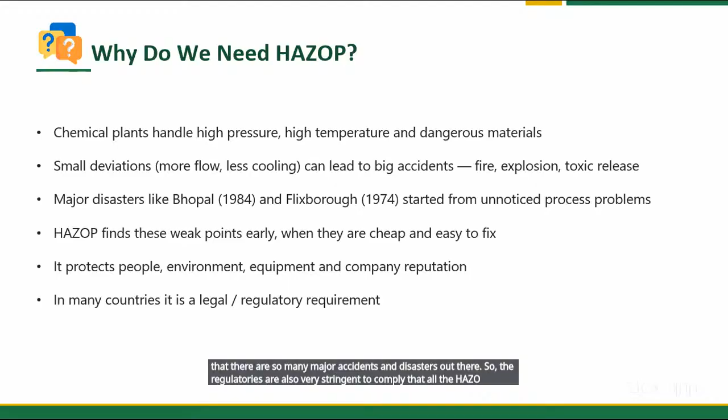Yeah, if there is any suggestion you can just give me during the presentation, so I can go much faster, you can also suggest me. Sir, good afternoon. This is okay, sir. It is not too fast, not too slow. You can go at this pace. Thank you. Okay, thank you so much. So basically, sir, one minute.

You can elaborate a little bit: process hazard analysis and QRA are correlated. These documents are also key documents for further analysis in the HAZOP study. Yeah, it is also part of it, particularly in HAZOP when we break down the process. The storage part is particularly covered in the QRA, because there is bulk storage, and the more hazardous area is the bulk storage for raw materials and particular chemicals. At that time, PHA and QRA are also a major part of the HAZOP. In the next couple of slides, I will brief you on where the QRA is covered in the HAZOP.

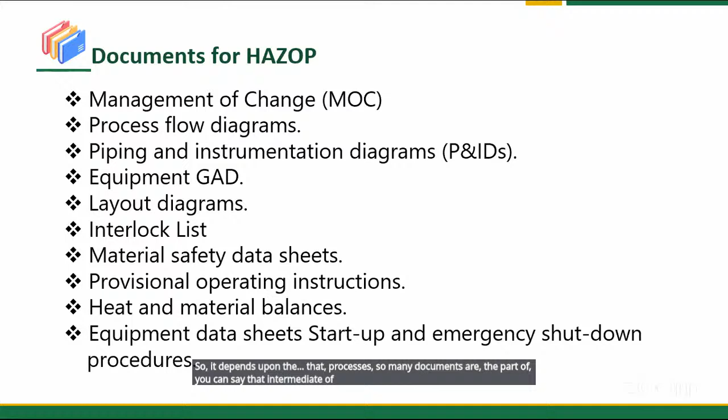Now coming forward, what are the key terms we have to use? First is a node. Node means the one section of the plant that we study at a time. Just giving one example, one vessel or tank is there, a reactor is there. Normally we are pumping the material to another tank. So this particular part we take for the HAZOP study, and we mark it as a node, node 1, node 2, as we move through the process. So basically the node is a part.

Second is a parameter. What are the parameters we are using, like flow, pressure, temperature, level, and there are lots of parameters. Particularly we can say time also, and some other parameters depend upon your processes. So the basic parameters are level, flow, pressure, temperature.

Guide words: we have already said that the 7 guide words we have to apply for all the parameters, like no, more, less, as well as more than. All the guide words should be applied for each parameter. Then deviation. We have to identify for each guide word; suppose we mention flow, we have to mention if there is no flow, what will be the deviation. Second, if the flow increases, more flow, what will be the deviation. I have one format we will discuss later on, so it will be visible how the parameters and deviations work.

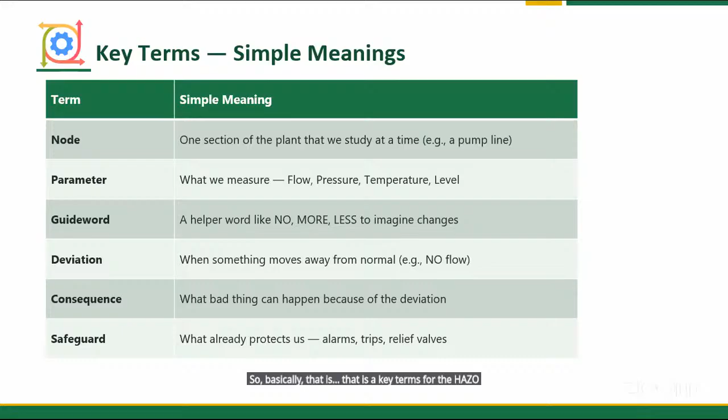So these are the hazard versus deviation in this process. The hazard is something with power to cause harm. The harm due to that particular activity and process will be the hazard, like flammable materials like fuel and solvent, toxic gases, high pressure and high temperature reactions, any reactive materials handling, hot surfaces or rotating machineries. A hazard is always there. We must control it.

We can say that for the processes we have predefined, there is a much lower probability to eliminate or substitute, because when we are at the stage of the HAZOP, we have already tried all the things that we can eliminate and substitute, but there is no possibility to eliminate. So ultimately we have to go for the best control, which is engineering control. So we will look at how the engineering control will work.

Then the deviation part, like the process going away from the normal. So what are the parameters and what are the design criteria we have defined? If during the process it does not match or it is deviated, that can lead to any minor or major type of disaster or accident.

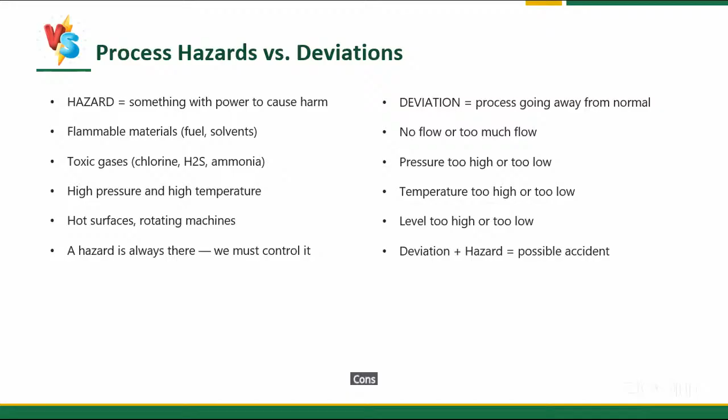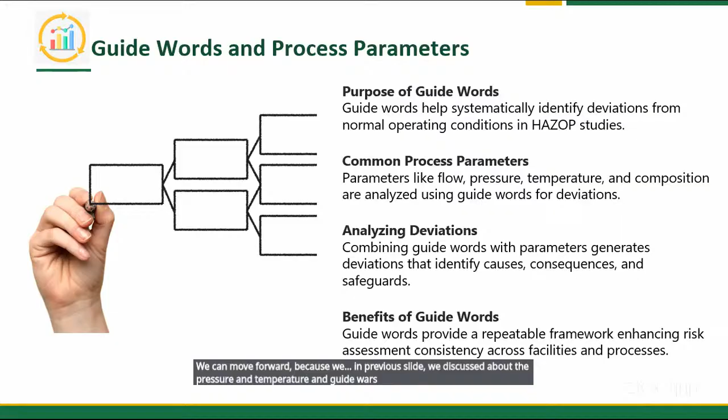So guidewords and process parameters. Basically, we have already discussed guidewords, but we can move forward because in the previous slide we discussed pressure, temperature and guidewords. So now what each guideword means, with some examples. Suppose we consider "no": whatever flow or parameter we are considering, the design intent is not achieved; that particular parameter is not coming there. So no flow when production is expected.

Suppose, as in the example we have taken, a material is transferring from one tank to another tank. At that time, for any reason, due to a deviation, the flow is not coming. So is there any particular impact on the risk? So that will be for the word "no".

Second is "more". This means a quantitative increase. If the quantity increases in any parameter like flow, temperature or pressure, then what will be the consequence? That should be defined. Same thing for "less". Less means the quantity is decreased. If the quantity is lesser, what will be the consequence? Like pressure will be low, flow will be lesser, temperature will be lesser.

So what will be the particular consequence due to that deviation. "As well as": an additional activity occurs, other valve closes at the same time. Sometimes "as well as" means there is a human error. We have to open only one valve, but by misoperation another activity also started at the same time from the same equipment or same node. So two activities happen at the same time.

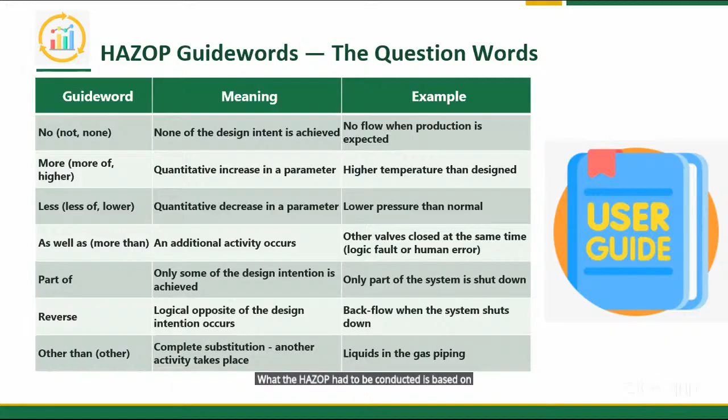Some more words we can also use based on our processes, like unclear. Suppose for any of the equipment or any process changeover we have, the main part of that equipment and the process should be clear, but if it is not clear, then it can also lead to accidents.

Steps in wrong places: the process will lead to action out of correct sequence or recovery fail. Suppose we have to charge three materials A, B, C, first A, then B, and then C. But due to some wrong step and wrong operation, material B is charged first, and then we have charged material A. So in that condition, wrong charging of the material can lead to an accident or failure, and this should be considered.

Wrong action, specific actions: sometimes there are process deviations, and a process parameter we have designed fails, but at that time we sometimes say that nothing will happen, we can take the risk. So that wrong action should be defined.

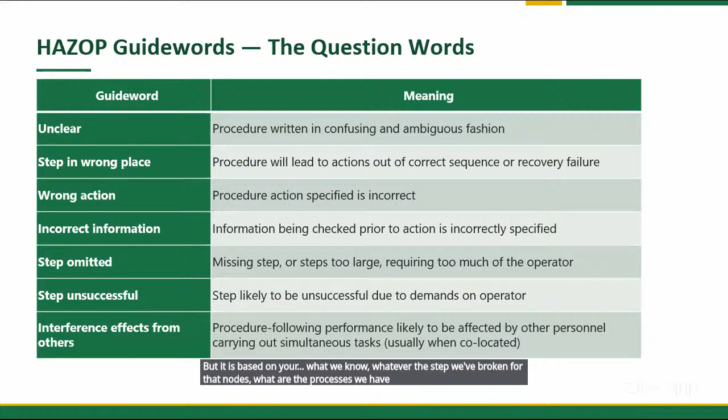In the guide words we can use these, but it is based on what we know, whatever steps we broke down for those nodes, and what processes we have covered step by step. So some of these words we can also use at that time. Particularly if an exothermic reaction is there and we have to provide cooling media at a particular timing, that should be covered under time. If it is more or less, then what will be the effect and what will be the consequence.

Same with sequence: suppose we have to add first solvent or chemical, then after that we have to charge the powder. But if someone alternates the sequence, then what the consequence will be should be defined. Procedures not available, not applicable, not followed.

In most cases the procedures are deviated and not followed because there is no control. We can say that self discipline is the matter in whether to follow or not. Like we can say that the helmet is compulsory to wear, but it is self discipline whether people are wearing it or not. So this procedure should be part of the HAZOP words.

Measurement: instrument failure, observation error. In a HAZOP study, most of the time we have provided some level transmitter, pressure transmitter, and there are measuring equipment and instruments, and we are 100% reliant on that instrument. But in case that instrument fails, then what will be the consequence? So that should also be considered in the HAZOP study.

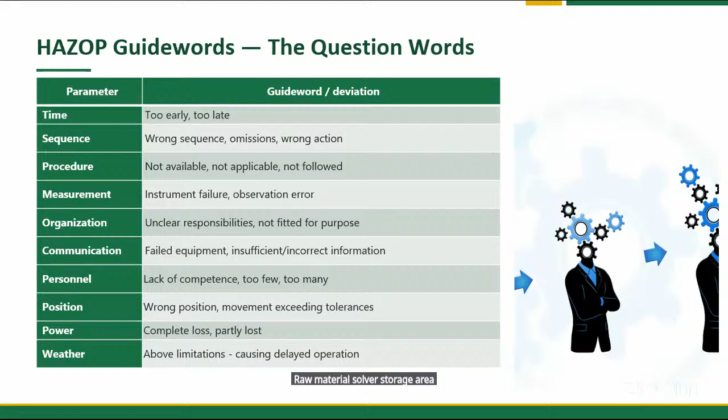raw material solvent storage area. Due to that, in the monsoon season, the lightning was captured by that tower, and due to that, the raw material storage area caught fire. So that should be also considered during the weather part also.

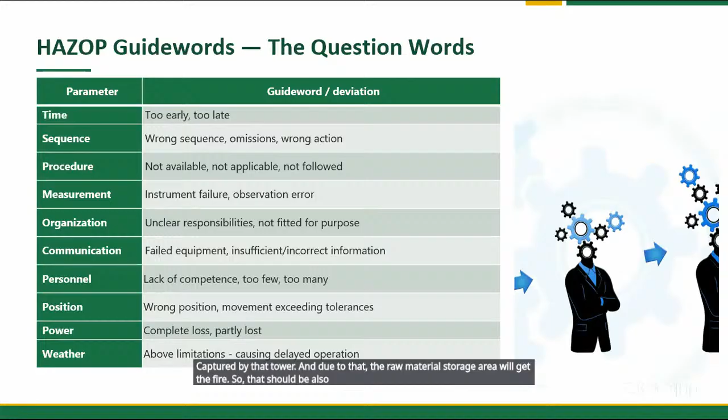This is only a list - some of the parts we can cover like flow, pressure, temperature already. Sometimes mixing also - whether the mixing is completed or not. If the mixing is not done properly, that can lead to accidents or miss out of parameters. So in process, whether sampling is required or not should be decided in mixing.

Stirring is the same kind of thing. In case the stirring is not done, agitating is not done, it should also be considered. Sometimes we have in DCS an indication that the agitator is moving, but suppose the agitator is disconnected from the motor - how can we ensure that by DCS?

So we have to display what ampere is being taken, what RPM is going on. So we can assume, we can show, that there is stirring going on. Same with transfer, level, viscosity, reactions, compositions. If any compositions are there, any additions, any separations, it should be checked if it is done properly as per our process. Then speed like RPM, I have told you.

Particle size - if we are preparing any solid parts, making any process part of a particular particle size, it should also be considered from the dust explosion point of view. Measures and controls, we have already discussed.

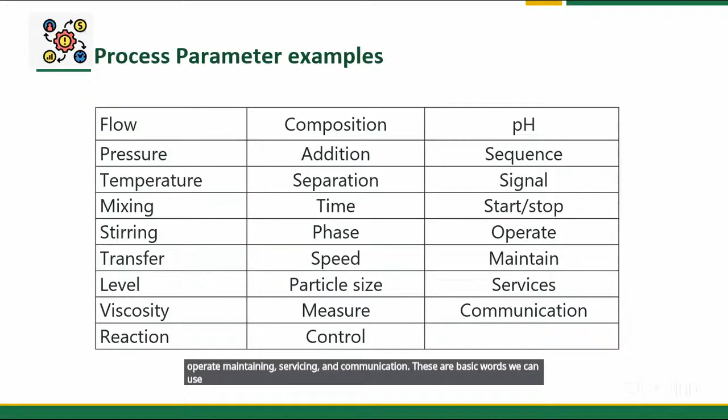So what we have discussed step by step - that word we discussed earlier - this is the flow for that step by step. First of all, we have to select a node, whatever P&ID we have, and whatever points we have to cover should first be covered into one section - in what we call a node. Second is to understand the design intent.

What is the intention for that design and what is the understanding? So it should be mentioned what our intention is. Apply a guide word and get a deviation. If we use that guide word, we can get the deviation. Without a guide word, we cannot get the deviation.

Then possible cause - what are the possible causes due to that deviation? Then think about the consequences - what are the consequences due to those causes? And what existing safeguards we have, what safeguards are provided in the particular process. And after that, if there is any gap, there is a risk matrix.

So we have whatever risk should be considered by a quantitative method. So we have some figure that indicates whether this is a high risk, low risk, medium risk, or moderate risk.

After that, if the risk is moderate or low, we can move forward without any recommendations or additional safeguards beyond our existing ones. But if the risk is high, then we need to implement improved safeguards. After that, we repeat this for every guide word and every node. This process should be applied to each and every node.

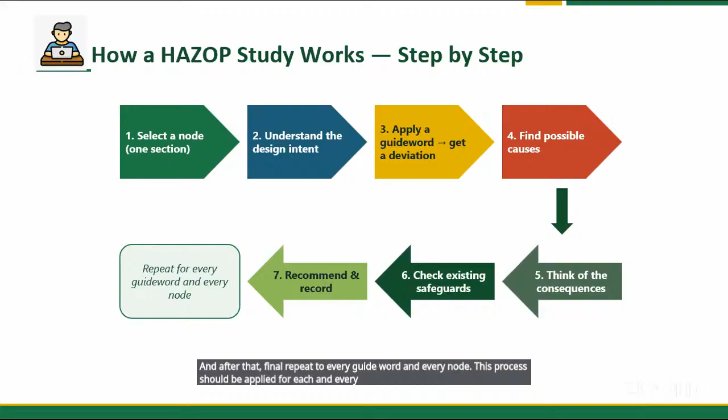So basically, the HAZOP worksheet documents this. I'll skip this slide because I have a worksheet in the next slide, so we will go with that worksheet.

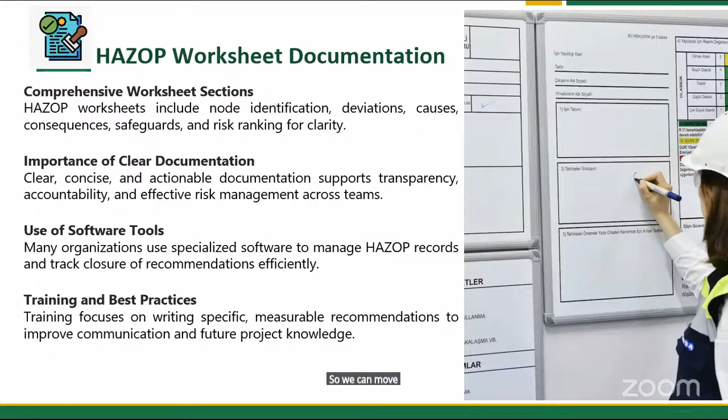I've taken one example for that. Suppose we have a reaction with pressure and temperature, numbered R101. So reactor 101 has pressure and temperature. What are the causes for that?

There is an exothermic reaction, and the consequence is that the reactor will be pressurized. So what are the safeguards? Whatever the operating pressure is, the design pressure for that reactor should first be considered in the GA drawing or design part. There is a pressure transmitter and pressure indicator provided for that reactor to indicate and observe pressure. A pressure safety valve and rupture discs are provided, PSV and PSRD.

There are two PSRDs and one PSV provided for emergencies. If any pressure builds up, the rupture disc and PSV will pop up. For the exothermic reaction, there's a provision of minus 20 degree chilling into the reactor jacket.

Second thing is flow. The exothermic reaction is due to the flow, so a flow meter and flow recorder are provided. The solvent is stopped by the XV valve if the pressure increases in the reactor - it's an interlock. If the flow increases, or temperature or pressure increases, the charging line will stop addition by closing the auto valve, the XV valve.

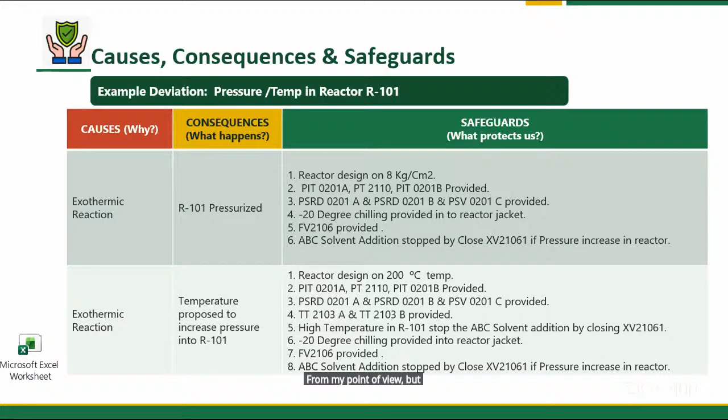But depending upon the process, this is our risk matrix, which I follow based on my previous industry experience. Basically it differs from company to company or consultant to consultant, depending upon the SOPs. So this is a risk matrix.

First of all, you can see there's a quantitative approach - this is frequency per year, based on our historical data. We have to identify from this column the unwanted events that have occurred in the specified time of operation within this industry using the same technology - whether the same unwanted event is almost certain to occur in this type of operation during the life of the operation. There's some wording difference in the evaluation of this quantitative approach versus the historical approach.

Same thing is mentioned here. Basically, if you have any engineering controls, suppose there is no safeguard to prevent that, then you have to put a rank of 5.

Suppose you have a single safeguard with the engineering control, you can mention 4. If there are 2 safeguards, then we can mention 3.

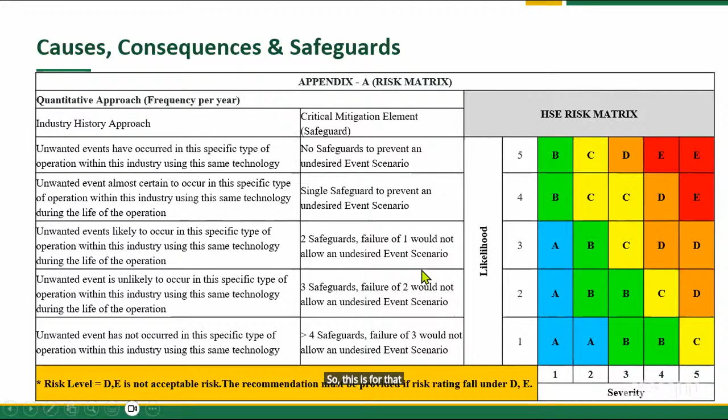So this is for that particular likelihood, and same is for the severity. So basically the severity is based on property damage also, and human injuries also.

So for human injuries, suppose minor injuries or illness due to that particular accident or movement, it will come into 1. We can say that's the bottom of that severity; it is on the second page, due to that space 1 2 3 4 5. Same here is 1 2 3 4 5.

So if medical treatment and hospital admission is due to that incident, then it will be covered under that type of severity, will be 2. Permanent disability will be 3. One fatality will be 4, and more than one fatality will be 5.

Same will be for the property damage, from on-site facility damage and environmental impact also. So in that you can also add more columns and more effects. You can also say that if any other industry has three reportable accidents, then it is also acceptable. So it is based on the industry and the procedure you are following.

So this is like one of the case studies.

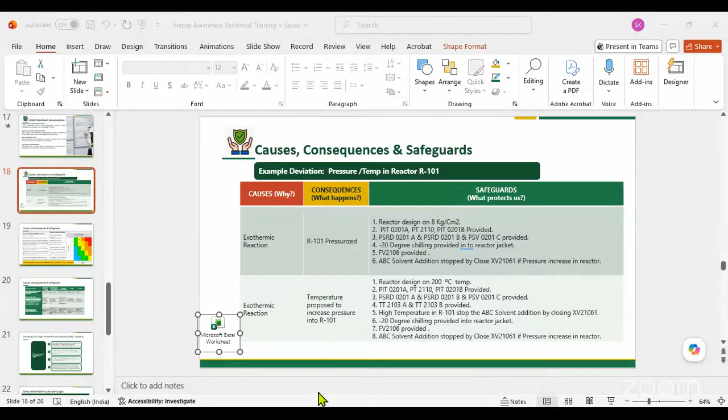Can I show you the format what we have discussed right now? Is it visible? No. Yes sir, it is visible. Only your slide is visible, not the format. Okay, just a minute. Yes, is it visible or? Yes, now it is visible, sir.

So this is the format we are using right now. This is the reference number of the drawing. First of all, we have it step by step for node one, and this is the drawing number, the P&ID number. This is the revision number, and this is the date for that particular P&ID drawing.

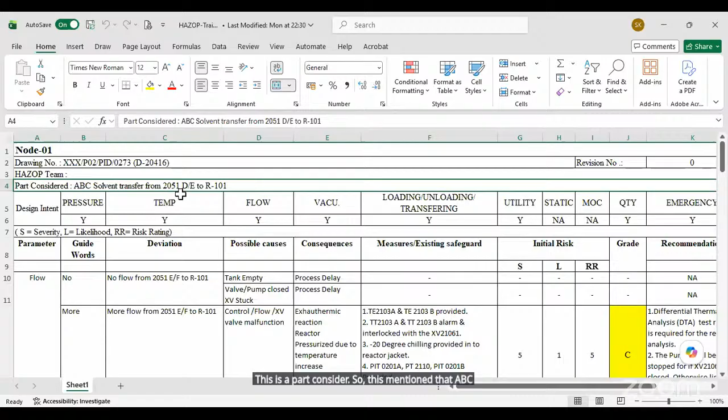Second is the HAZOP team, what team members are there in the study. This is the part considered, so it is mentioned that ABC type solvent is transferred from this tank to this reactor. So this is the part considered for node one.

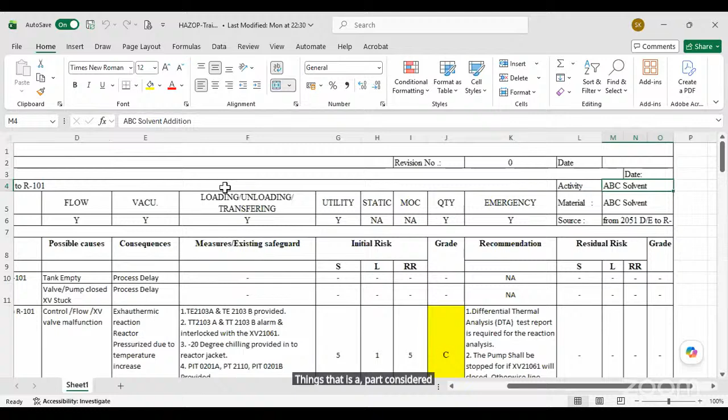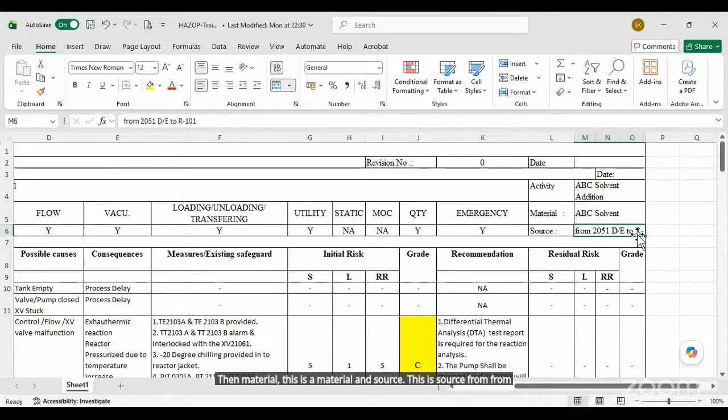And this is the activity here, mentioned that ABC solvent transferring, solvent addition, then material - this is the material and source, this is the source from this tank to this reactor. Okay, and this is the design intent.

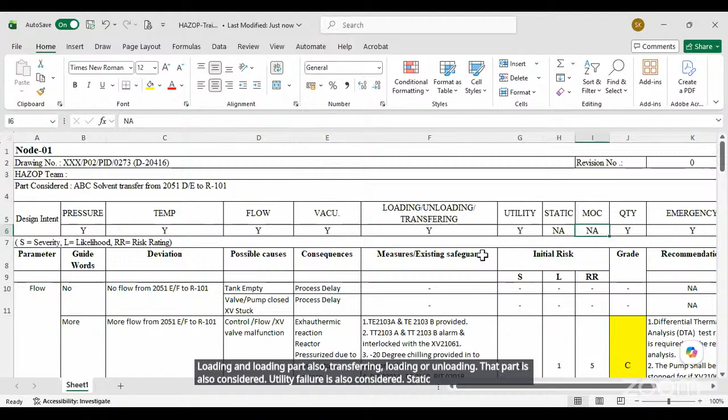So we have considered pressure, temperature, flow, vacuum, loading, unloading part also, transferring, loading or unloading - that part is also considered. Utility failure is also considered. Static is not considered. MOC not considered. Quantity is considered. Emergency considered.

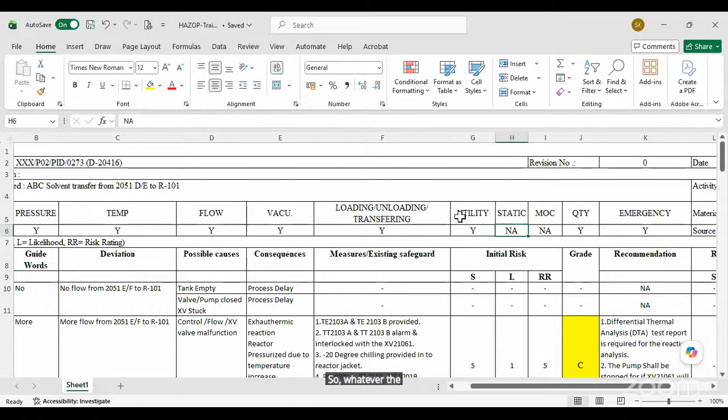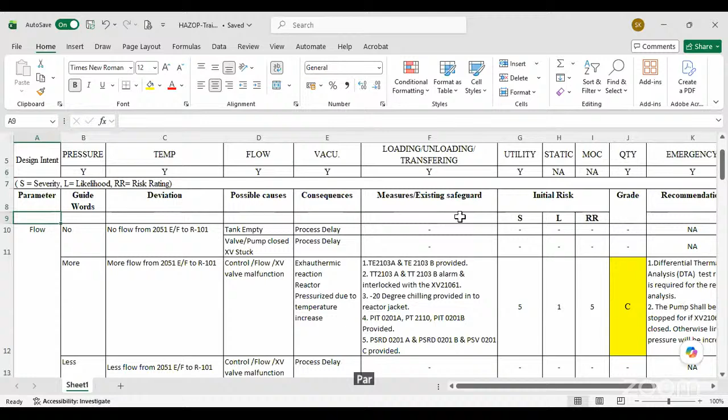So whatever the parts and intents we are using, we have designed - this is a summary so we can get the data that yes, in this node we have considered all the parameters. So basically first of all the parameter here is flow, then this is the guide word.

So suppose there is no flow, so what is the deviation? No flow from 2051 tank to 101 reactor. So what is the cause? Why is the flow not coming? First of all, maybe the tank is empty. Second, the valve or pump or any of the control XV valve, the automation valve is stuck or it is closed.

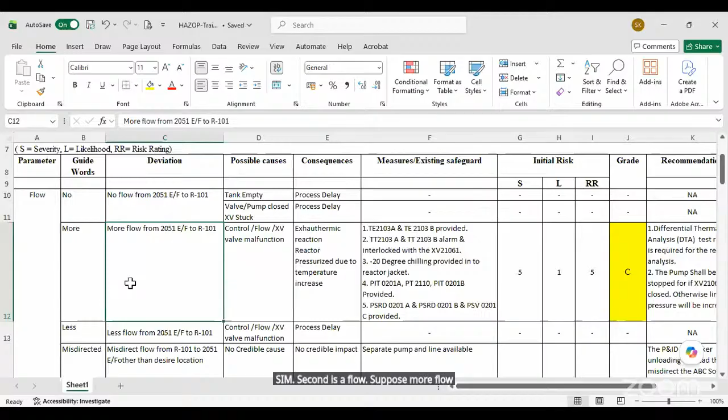So basically, this is a process delay. There are no consequences due to that particular cause, like if the material is not transferred, there is a process delay, nothing - no safety risk is there. Same thing in that case. Same, second is flow - suppose more flow from same tank to reactor. There is a possibility of control valve, flow valve or XV valve malfunction.

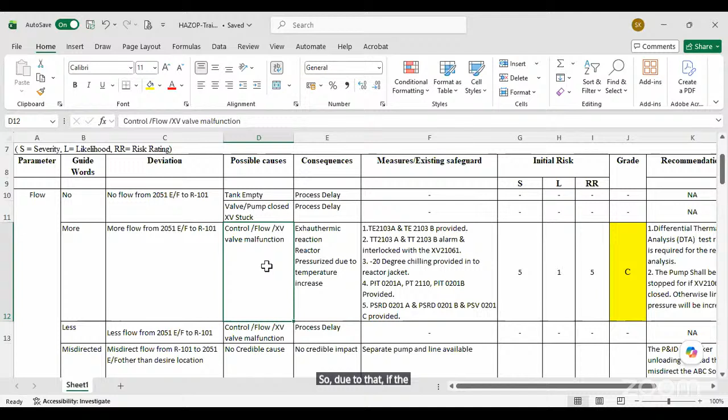So due to that, if the control valve decided that it should be a 20% opening, but particularly during the operation it goes to 30 or 40% opening due to any of the mechanical integrity. So due to that, if the material is charged more in a shorter time, then it will go to an exothermic reaction and the reactor will get pressurized.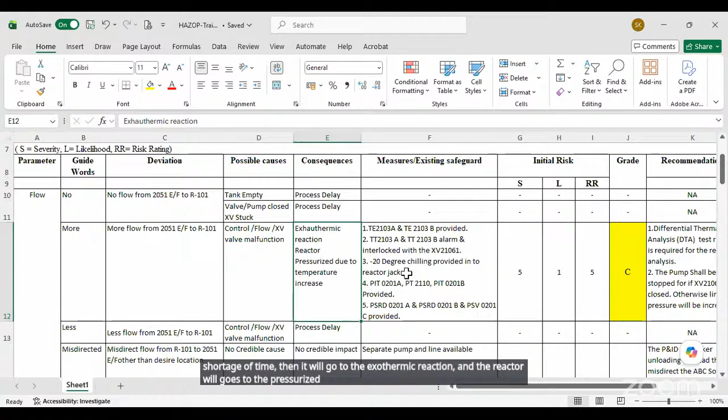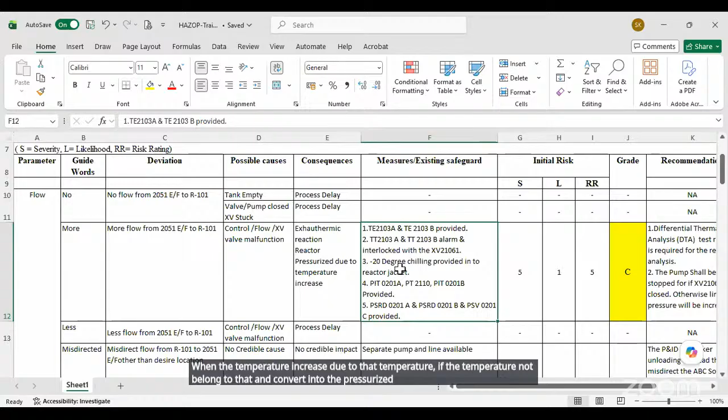For that control, what are the existing safeguards? So temperature indicators are there, temperature transmitters are there, which are interlocked with the transferring auto valve. So in that case, suppose temperature is increased or any pressure is increased, it will give an alarm, as well as the valve will be closed. Same, when the temperature increases, if the temperature goes beyond that and converts into a pressurized reaction, minus 20 degree temperature, like brine, is given to control that heat.

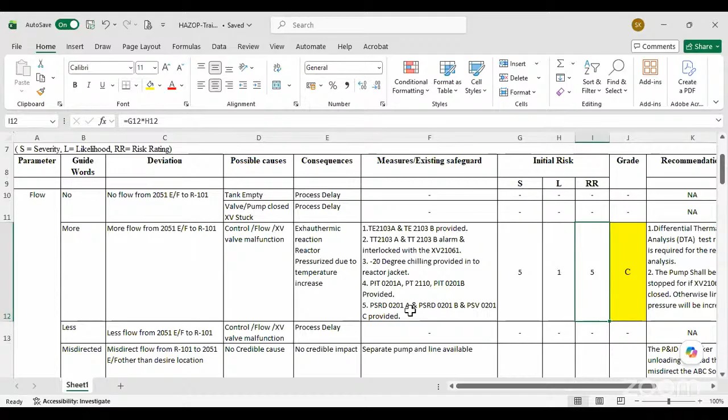Same process, pressure indicator and pressure transmitter are provided. Same thing, the pressure safety valve and rupture disc are provided. In that case, this is an existing system, and based on that, the severity is high because a pressurized reaction is there. But the likelihood is much lower because there are more than four controls for this particular deviation. So the risk rating is only 5, and this is acceptable in that case, but we have some hidden risk also, so we have to know which process parameters can be deviated if the reaction goes under pressure.

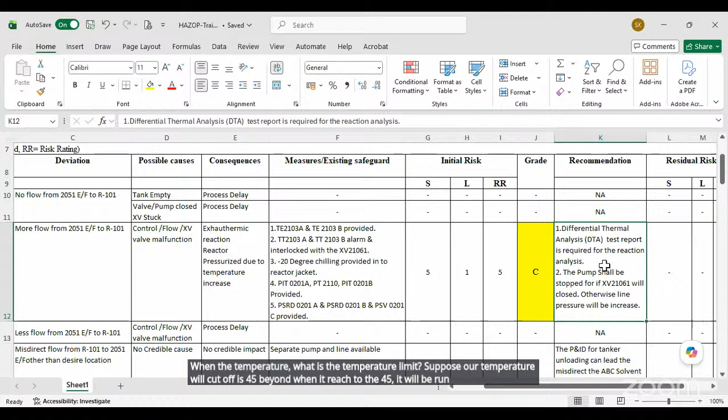So a differential thermal analysis, DTA test, is required for the reaction analysis. What is the temperature limit? Suppose our temperature cut-off is 45. When it reaches 45, it will be a runaway reaction. That should be known before batch transmission and before that process. So there should be lab trials, and in that lab trial we have to know the diagram for the pressure and reaction temperature, and if the pressure will be raised around 50-degree temperature, we have to control it around 40-degree temperature. So we cannot go to 50.

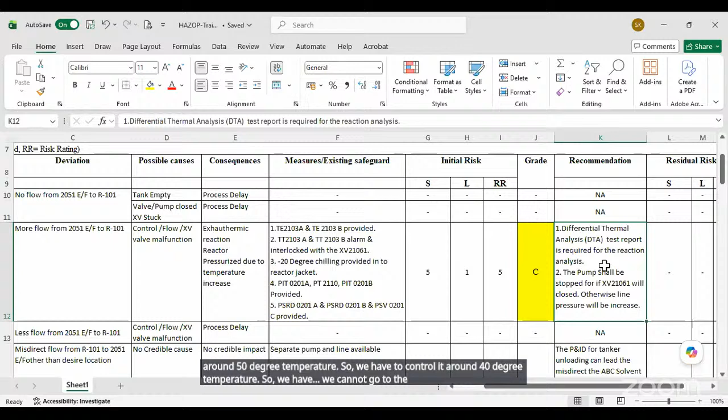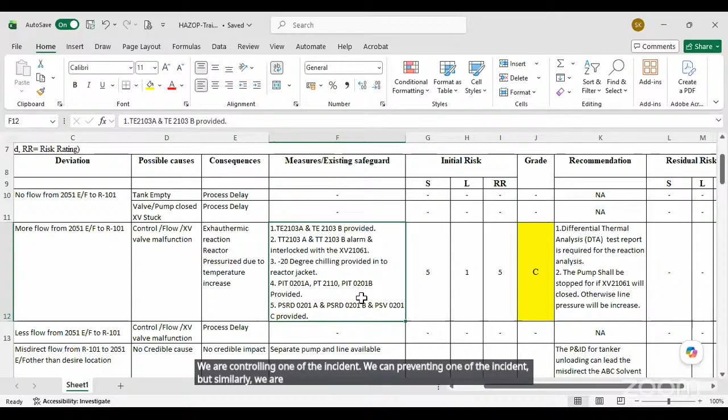Same thing, suppose the pump should be stopped, for that the XV will close, otherwise the line pressure will be increased. In that case, the interlock was provided that the valve will be closed, but while we are preventing one accident, similarly we are inviting a second accident. Like suppose the pump is continuously operating and we have stopped that valve in that line. So the line pressure will be increased, and flange joint leakage can happen, or maybe a pump fire can occur due to overheating. So this should also be covered in that recommendation. Even if the risk rating is 5 and acceptable, some of the hidden parts should be covered during the HAZOP study.

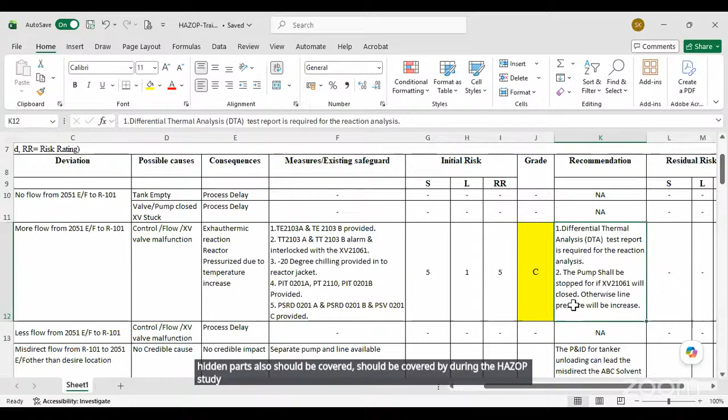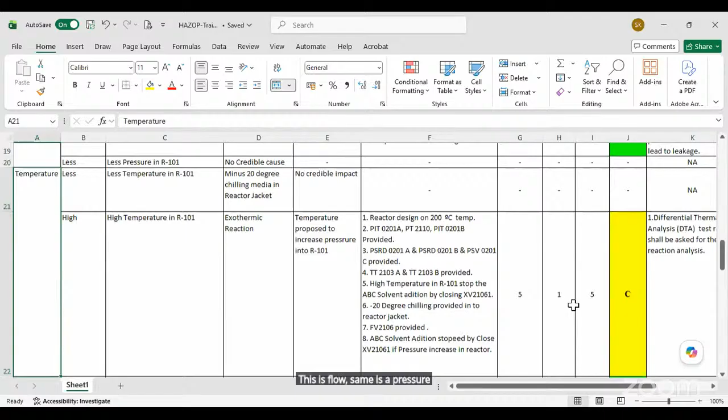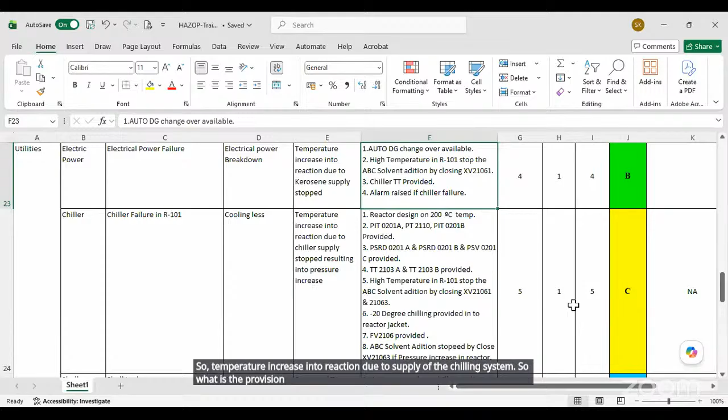So this is one of the examples. So this is flow, same is pressure, same is temperature, same is utility failure. So in case of utility failure, what are the parameters, how can you monitor? Like suppose electrical failure is there, so temperature increases in the reaction due to the chilling system supply. So what provision is there? Auto DG set changeover is available. In case of power failure, within 2 minutes it will be operating on the DG set, diesel operated generator. Then on high temperature in the reactor, solvent addition will be automatically closed in case of power failure. Alarm raised in case of chiller failure, or chiller TT.

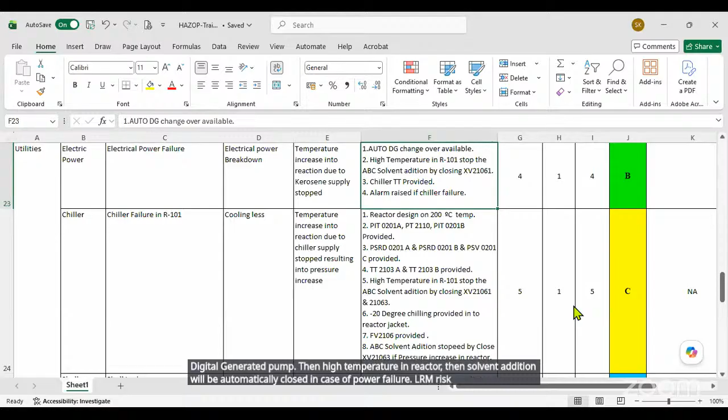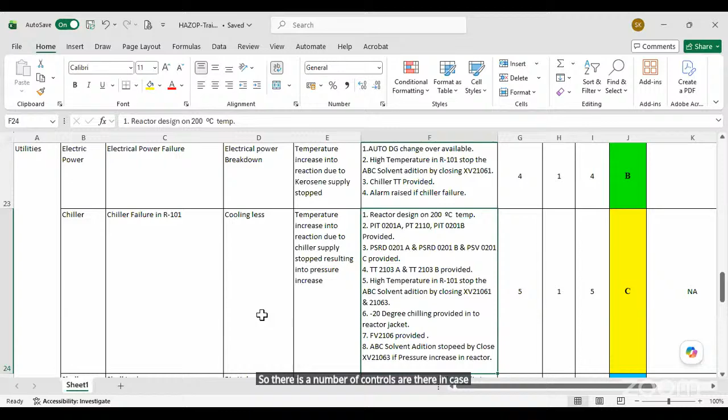There is a provision for a temperature transmitter also in the chiller, whatever chilling system is provided. Same in case of chiller failure. So there are a number of controls in case of failure of the cooling system. So those controls should be covered during the P&ID review and during the HAZOP study.

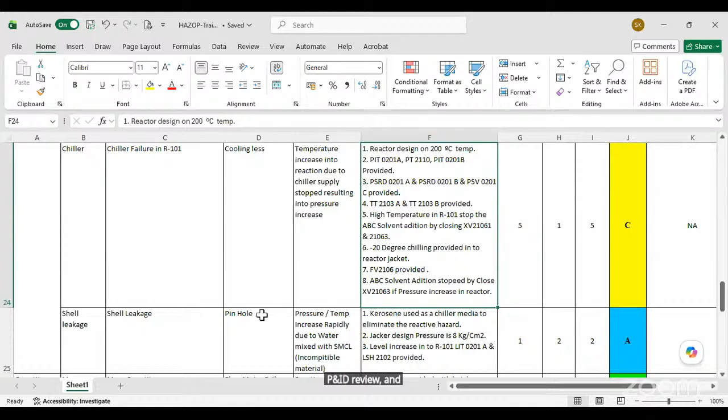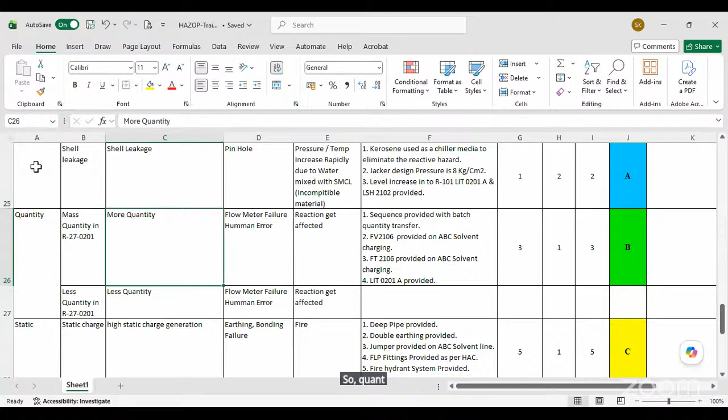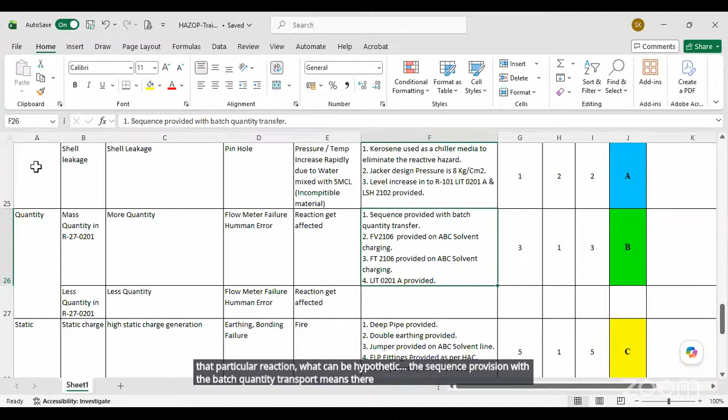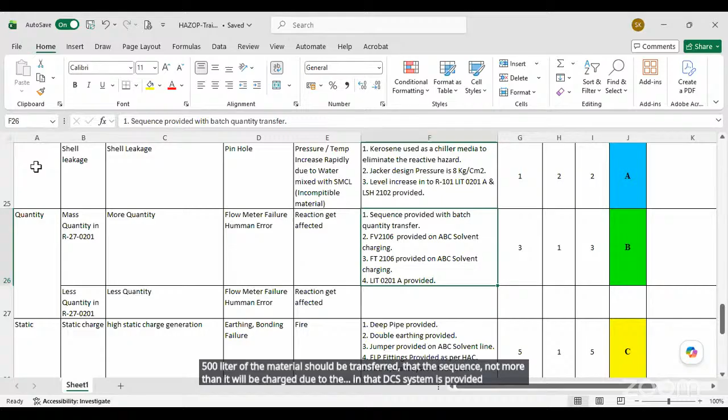Same thing, there is an exothermic reaction, and its quantity matters. So if more quantity is charged in that particular reaction, what can happen? The sequence provision with the batch quantity means there is a provision that only 500 liters of the material should be transferred, not more, due to the DCS system provided. At the same time, time is also considered. If the material is charged faster in a shorter time, then what can happen during the reaction? So it is also covered in that part.

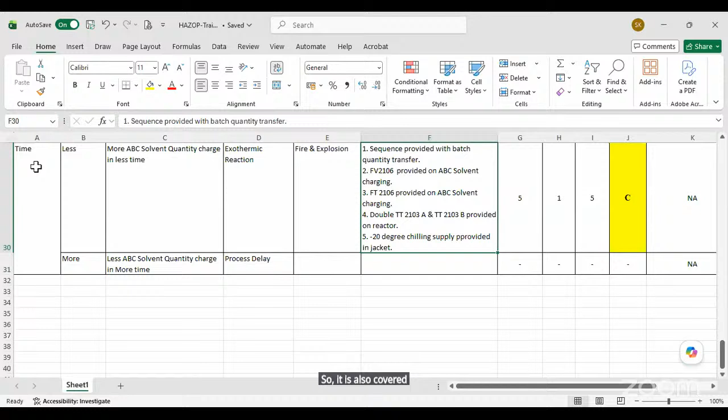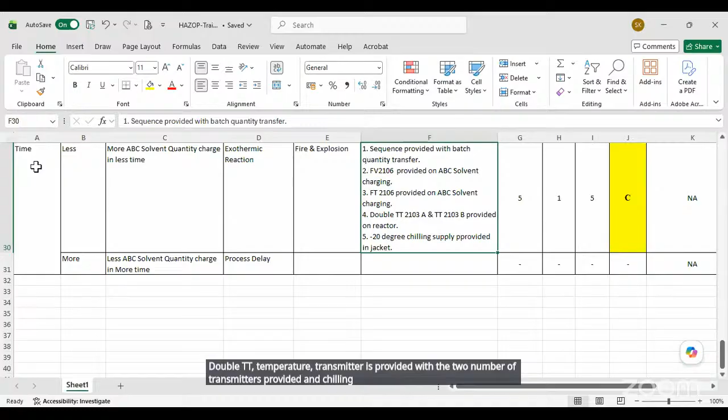So sequence provision is there, flow meter is there, flow transmitter is there, double TT, two temperature transmitters are provided, and a chilling system is there. So there are multiple controls.

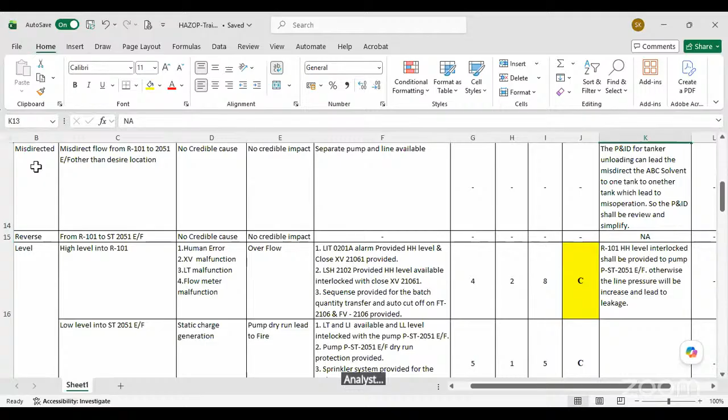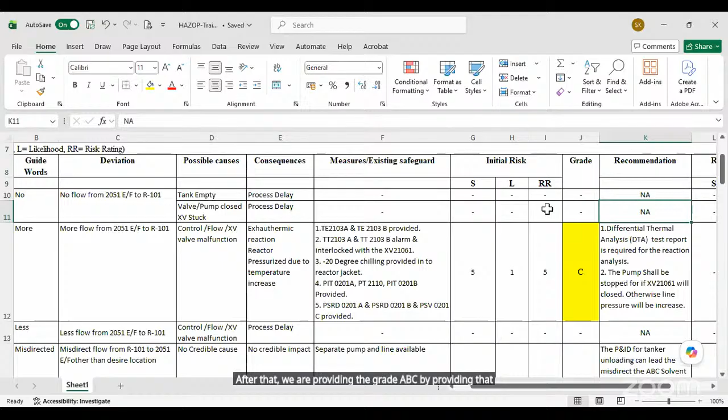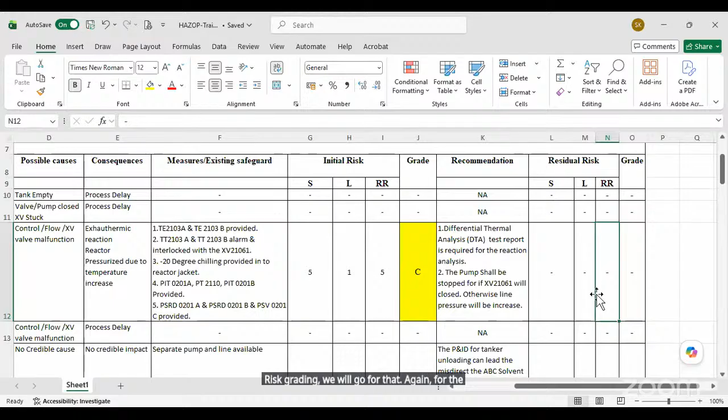This is a before analysis, before risk rating based on existing controls. After that, we are providing the grade ABC by providing that risk matrix. If additional recommendation is required, it is mentioned here. And after completion of that risk rating, we will go again for the reduction of risk. What risk we have reduced, before and after, will be calculated after compliance with the recommendation.

Is it okay? Yeah. Yes, sir. Go ahead. Okay. Doctor Sahab, shall I ask later on or shall I ask now? Yeah, we can right now. Sorry to disturb you. Now here I have two questions, right? Yeah, maybe a healthy discussion. It's not fault finding, right? Yeah.

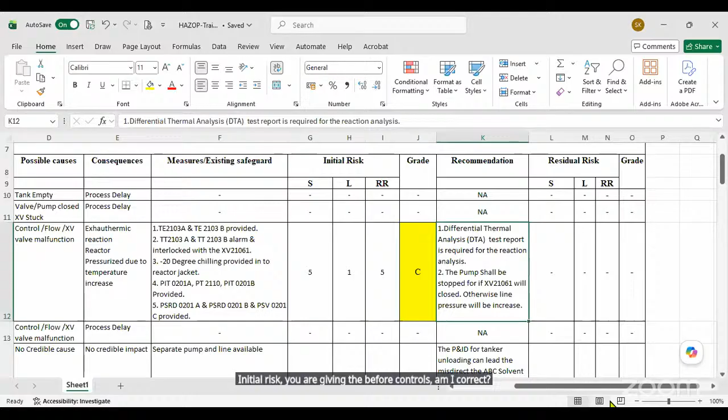The initial risk, you are giving before controls. Am I correct? Is it visible right now? Yeah, it's visible, this table and chart are visible. The initial risk you are giving before controls, am I correct? Now the residual risk we are telling after the recommendations are complied, then we'll see the residual risk. Right. Correct.

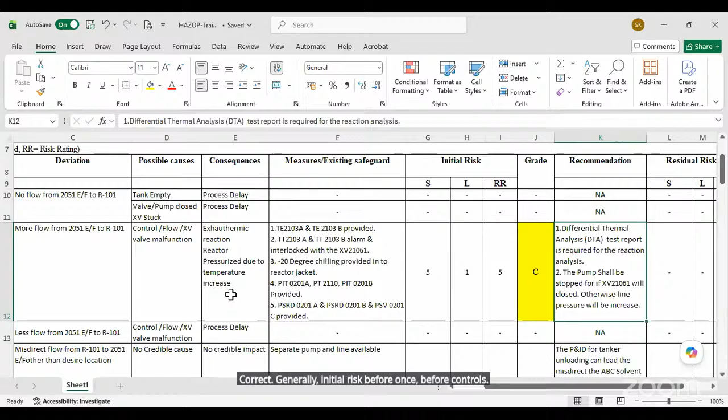Generally initial risk is before controls, then after controls, residual risk. Any other recommendation you are giving, even though it is acceptable, then further we'll see. Generally, the initial risk will be before the existing controls, so that risk will always be a little bit higher before the controls than after the controls.

Now the second thing in this flow chart, or whatever you call this HAZOP sheet. On the top you said static is not considered, am I correct? But we have considered it in this sheet, right? Exactly. I'm telling again, it's not fault finding. Okay. It's just a typing error. I have also observed that during the discussion.

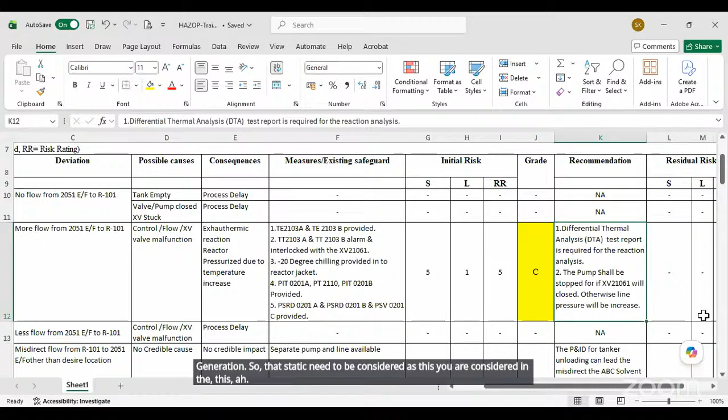Because with any solvent flowing from a tank to a reactor, definitely there will be static generation. So that static needs to be considered. You have considered it in the parameters, but you need to consider it there also; in place of NA we must write Y, right? Right. Otherwise this is good. Sorry to interrupt you. We can proceed further.

No, it's welcome. Actually, HAZOP is, we can say, a proactive approach. So before evaluating our risk rating, we have to consider what existing safeguards we have. Multiple safeguards are provided, that's why the initial risk rating is lower. But you can see in this sheet I have mentioned that risk levels D and E are not acceptable risk. In that case, the recommendation is compulsory to reduce the risk.

So here the grade is C. So we don't require any additional recommendation, because the existing safeguards are sufficient to control that risk. So the existing controls we have provided during process designing should be considered before installation, before designing, and before procurement and process finalization.

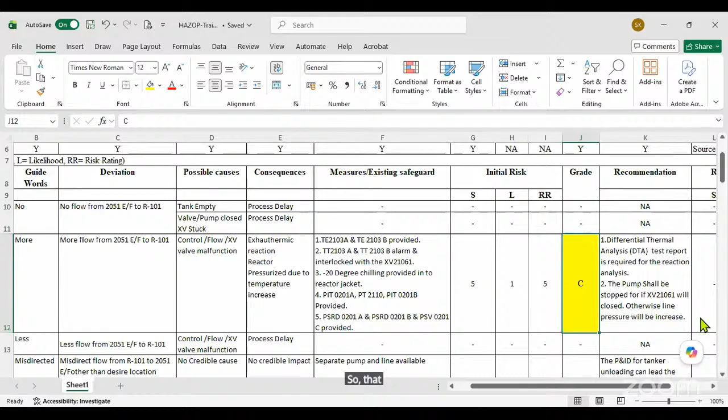So the existing system is where we are right now, based on the existing safeguards. And after discussion, suggestions, and so many communications, some control measures will additionally come from the teams. So that will be after the recommendation, for the risk reduction.

Can we move? Yes, please, sir. Doctor, please go ahead. Okay. Then the last one, we will finish within 5 to 10 minutes.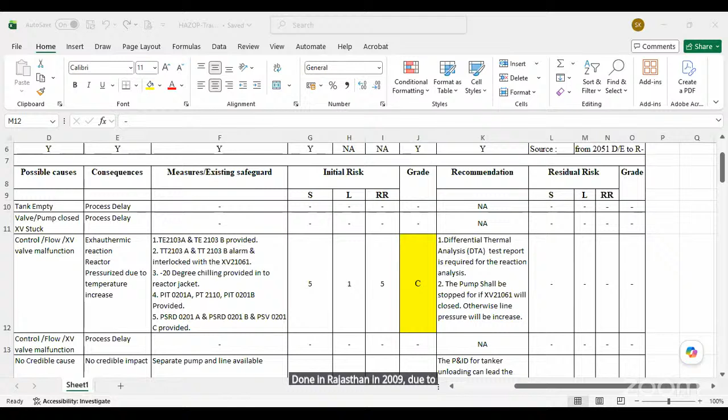So this is a case study done in Rajasthan in 2009, particularly due to leakage of motor spirit. In 2009, at the IOCL terminal in Jaipur, Rajasthan, there was a major leakage. That leak remained uncontrolled for approximately 70...

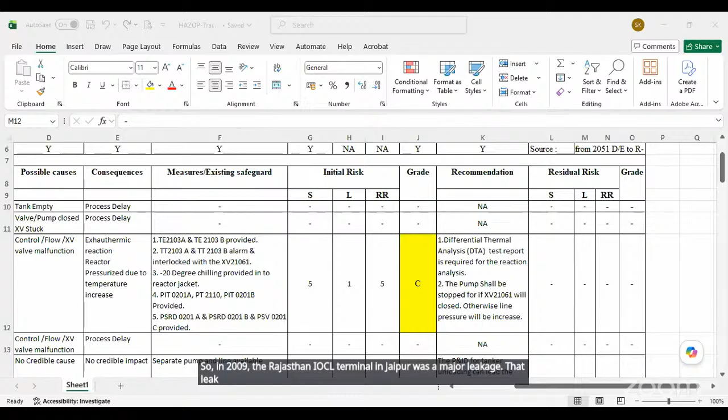Sir, the case study is not visible. Are you showing that? Sorry, the case study is not visible. Only your HAZOP sheet is visible. Okay, just a minute.

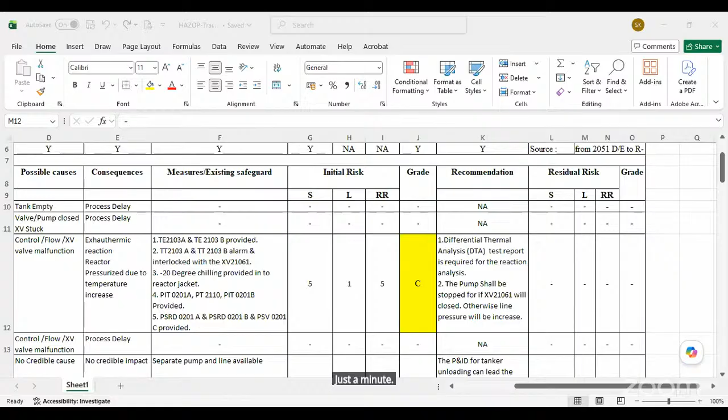Okay, now it is visible. Yeah, yeah. Yes, please. Yes, please. Yeah.

So in 2009, the IOC terminal in Jaipur had a major leakage of gasoline motor spirit, and due to that there was a major vapor cloud fire, and many people, I think around 11 fatalities, were there. The leak remained uncontrolled for approximately 75 minutes, resulting in the formation of a large flammable vapor cloud.

So the vapor cloud subsequently ignited, causing a severe vapor cloud explosion, followed by multiple tank fires throughout the terminal. There is multiple storage of flammable and petroleum products, and when the leakage happened, there were so many reasons behind that. The detection part also was not under observation.

When it was detected, at that time it had already spread out much more, and when the people were going for the control, the vapor cloud had already covered a much farther area. And after that, due to static charge, the vapor cloud explosion happened.

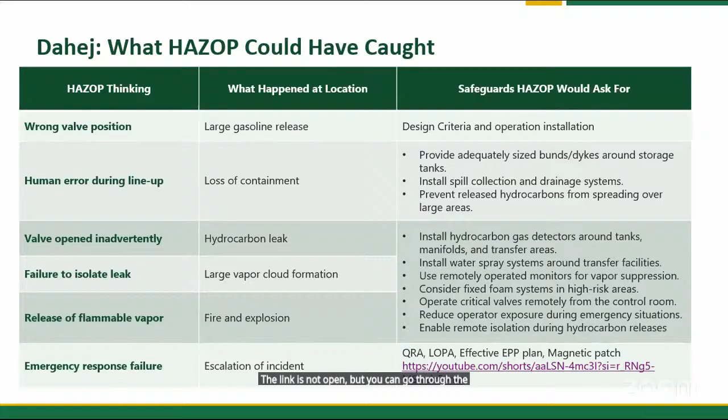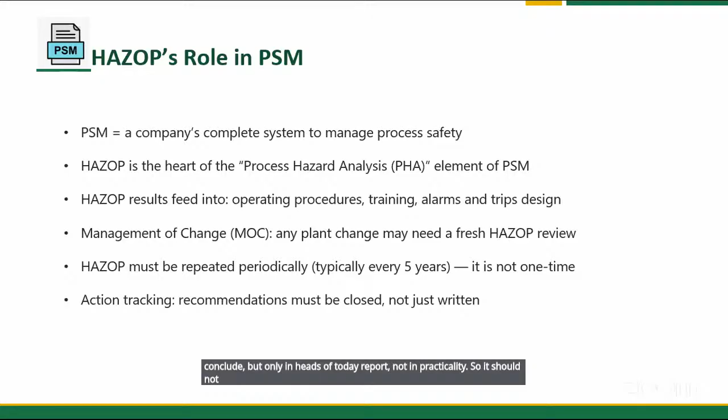And action tracking: recommendations must be closed, not just written. As I told before starting, most recommendations are concluded only in the HAZOP study report, not in practice. That should not be done; they should be complied with. The best practice for HAZOP is to include people who really operate and maintain the plant. So ground level people should also be part of the team, because we can get the practical approach from them. Use updated P&IDs. Old drawings give wrong results, so all documents should be up to date.

An experienced facilitator keeps the discussion focused and honest. Sometimes we hide some things and don't disclose the processes, and that doesn't help the HAZOP. So it should be disclosed, and be honest in disclosing the process. No blame culture. Every what-if question is welcome. Sometimes people say, this is not my point. That should not happen; we are working as one team, and when we ask multiple questions, we can get ideas and identify some risks too.

Be specific in the recommendation: who will do what and by when. When we recommend anything, who will comply with that point, how we can comply, and when we have to complete it should be specified. Close all actions and verify them in the field. Whatever suggestions there are should be updated into all the documents like P&IDs, procedures, process flow diagrams and all revised documents, and whether it is physically provided in the field should be verified.

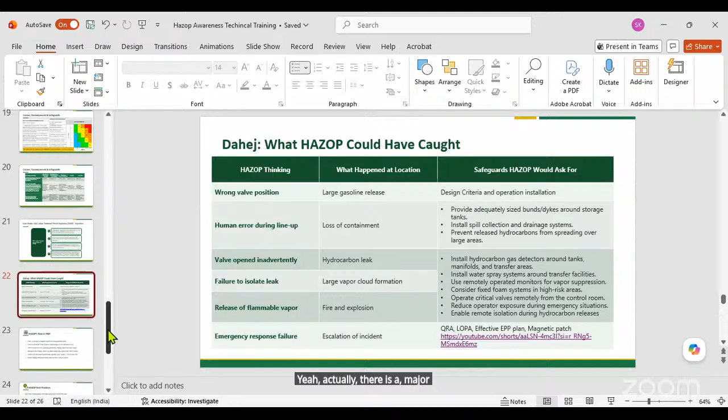Actually, there was a major leakage, and I have referred to the corrective action and investigation report. There are two or three things. The leakage happened, and when people went to the leakage, the approach was very difficult to close it. First of all, the process design part was not considered during designing, because it is a practical approach. No one considered, in case of leakage, how people would reach it; the installation was not feasible at that location.

Second thing, when it exploded, when the leakage was observed, around 75 minutes had passed since the leakage started. So the detection part was not there. No detector, like the LEL or VOC meter I mentioned, was installed there, and no alarm was provided in the DCS or local remote area, so that people could be aware something was wrong and the initial leakage could be detected.

Third, the vapor cloud was there, and there was no automatic sprinkler system; all things were manual, so people had to go there and start the firefighting or the dilution of that solvent. So basically those three or four things were majorly missing in that accident.